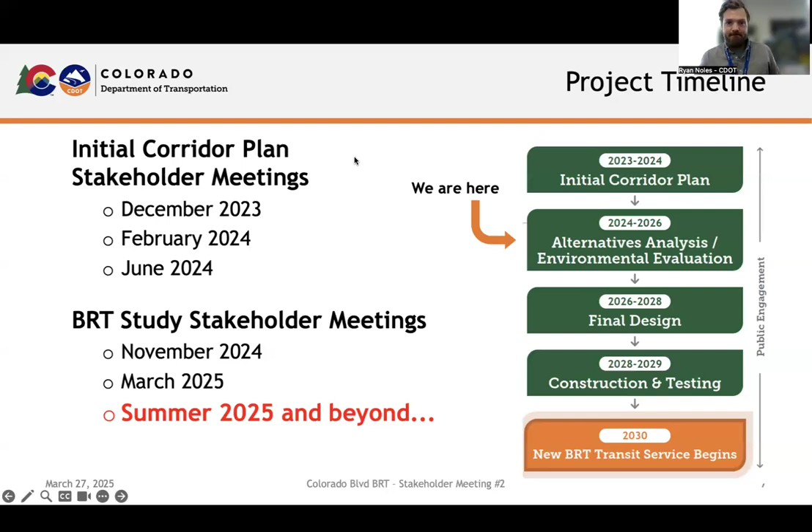So I think we talked a little bit about the project extents last time. Through our coordination with our local partners and our analysis of existing conditions, we have done some work around looking at what makes the most sense for the route for the BRT and for where stations could potentially be located. And so we looked at a lot of different pieces of data. We looked at employment density, propensity for transit, the existing Route 40 ridership, population density. We looked at some travel patterns using some openly available data, as well as land use and development trends.

And where we landed with the project scope from north to south is that the BRT should run between 40th and Colorado Station, which serves the A Line running between Union Station and the airport, and continue all the way to Southmoor Station, just south of Hampden near I-25. This is a little bit different than what we initially had discussed with the BRT ending at the Colorado Station, which is near Evans and Colorado, just south of that part of I-25. One of the reasons that we felt this was an important change to make is, one, it is the current route for the number 40 bus. So that is the route that would be replaced by the BRT.

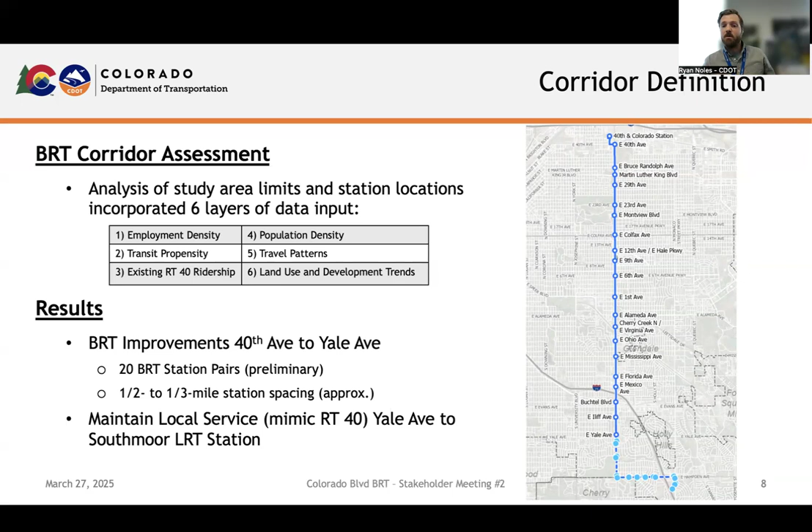We felt that given constrained budgets and ensuring that we're using the money that we're able to secure for this project most effectively, it was important to limit the capital improvements north of Yale Avenue, and then at some point south of Yale, and then over east on Hampden down to the Southmoor station could potentially be a phase two at a future date. Next slide.

Okay, so the timeline for the alternatives analysis in particular. So the last time we met, we were talking about concepts and the screening criteria for our tier one feasibility screening. This is sometimes called a fatal flaw analysis, and we'll talk a little bit more about that. So we've done that analysis, and I'll go over the results of it here shortly. Right now, we are just starting our tier two screening. This is where you start to get into specifics about each of the different alternatives, thinking about things like travel times, safety, connectivity, et cetera. So we'll talk more about that at the end of the presentation.

And then you can see once we start to wrap up this phase of the alternatives analysis, we will hold public meetings. So we are anticipating those for late June, early July, around there. And then starting in July, we will begin narrowing down the design of the project to what we call the preferred alternative. So with that, let's discuss the tier one feasibility screening.

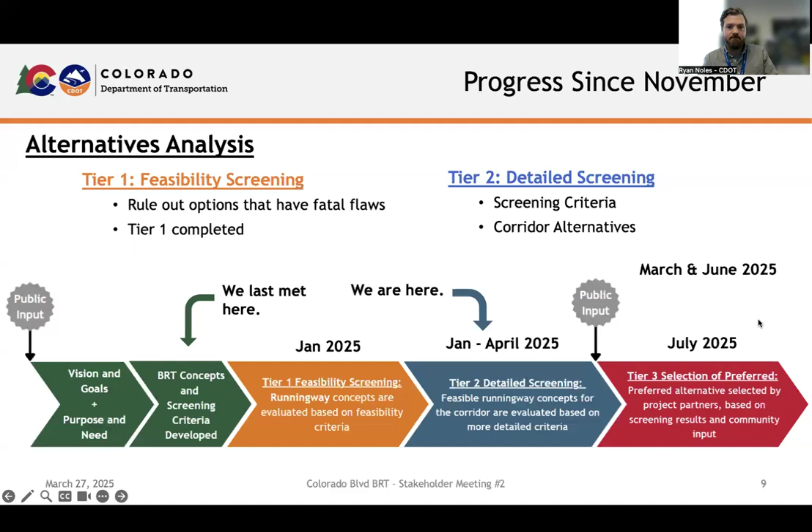But before I do that, one thing I did want to loop back on, and this was discussed at our first stakeholder meeting, was including a side transitway in that feasibility screening, so including it as one of the alternatives to be evaluated through this process. So we did go into what the side transitway could potentially look like for Colorado Boulevard, given that tier one analysis. So going forward, and next slide,

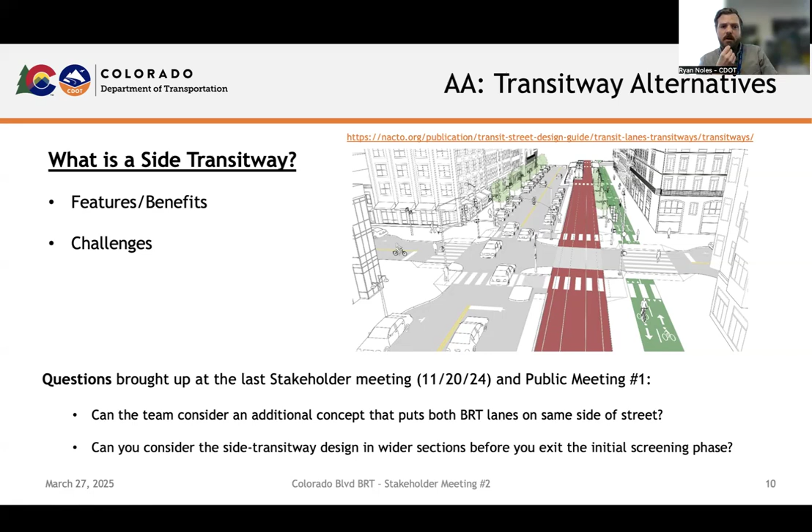we did include that. So some of the features of the side transitway that are a little bit different, which you can see in these graphics here, is that both of the transit lanes are all on one side of the street, as opposed to a center running BRT, which has the two lanes in the middle of the street and is typically separated by a median. Although I will say that the transitway alternative is very similar to a center running BRT where the lanes are not separated by a median. So that's maybe a distinction without a difference.

But then there's also the side running BRT, which has the bus lanes curbside running with the direction of traffic, so the two lanes on either side of the street. Mixed flow is very similar to side running BRT, except that it doesn't have the bus lanes. It has mixed flow traffic operations, meaning that the lane is shared with every other vehicle on the roadway. And then, as I mentioned, the side transitway is all on one side of the street or the other, so it could be on the east or the west side. We evaluated both in our fatal flaw analysis, and so we'll go through that. Next slide.

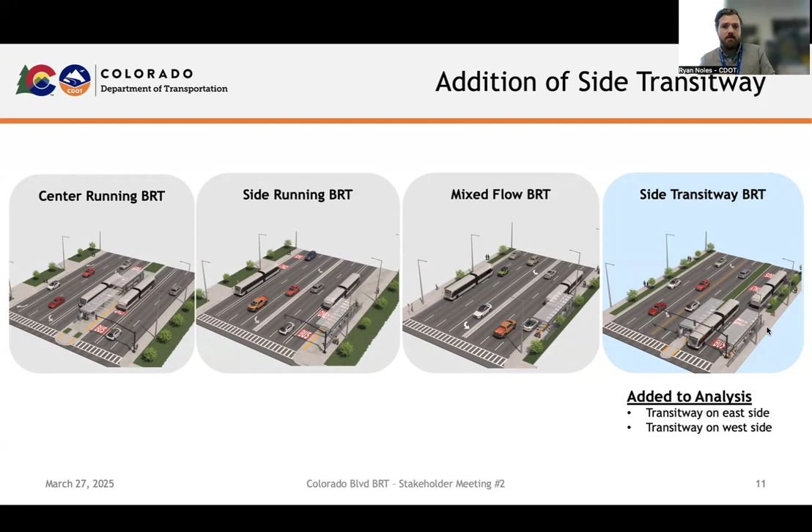So we did some research into where the side transitway works, and I'll talk a little bit about some examples that we looked at. And what we found in this research is that typically this is an alignment that's used with light rail versus bus rapid transit. And I suspect that has a lot to do with utility costs. So extending utility and catenary, which is the electric lines over the street, over the entire street is probably a lot more expensive than just having it on one side or the other.

It also works really well on one-way streets where you don't have a lot of bi-directional turning movements. Lower speed streets, it typically tends to work well on lower speed streets. That's certainly where we saw a lot of the examples. And then finally, really urban places that don't have a lot of curb cuts or driveways. So you don't have a lot of those bi-directional turning movements across the transitway. It's really kind of a guideway that is distinct within the curb to curb area, but also not really sharing much room with other transportation modes, I should say.

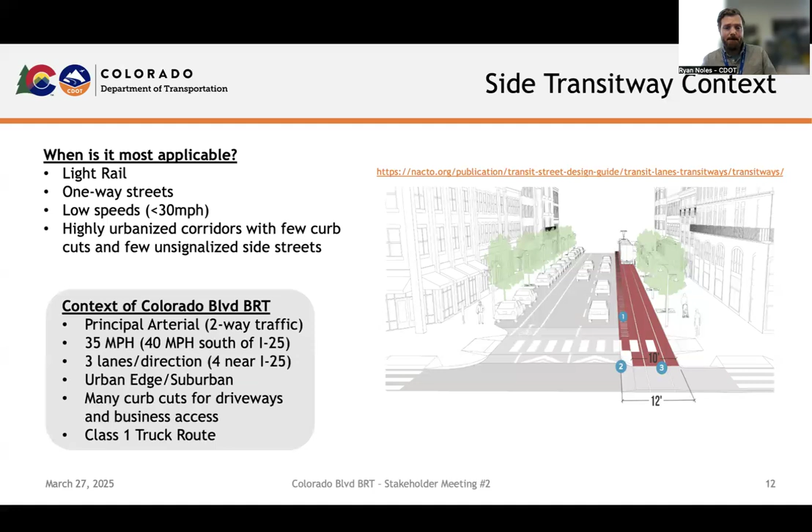So, I saw Jill, you wanted to ask that. Are our land use designations current or planned in Blueprint Denver? Yeah, when you say it's suburban or urban edge, is that the current land use or is that the future desired land use under Blueprint Denver? I believe it's the Blueprint Denver future land use. Is that right, Anthony? Yeah, it's both. That's the current land use, and it's kind of bleeding in towards more urban, but it's kind of in the middle there. But yeah, we looked at Blueprint Denver as well when we were categorizing it. Thanks.

So as I mentioned, sorry, hold on. I'm just going to jump in. Also from Colorado and I-25, from the Colorado station down to Colorado and Yale, we just completed and have the Near Southeast Denver neighborhood plan. That's in District 4, but I believe it continues. I don't actually know what the northern street would be for Colorado Boulevard. But the Near Southeast Denver neighborhood plan also went through an extensive process for that zoning. Thank you, Councilwoman.

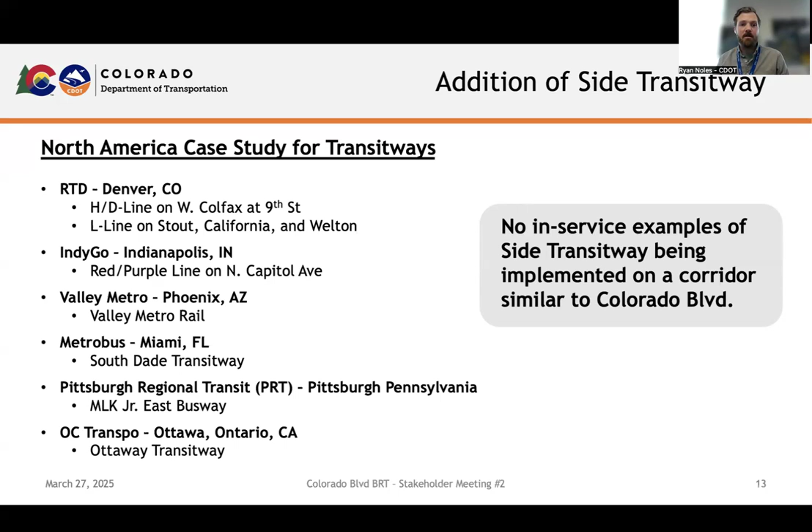Next slide. Any questions? I know we had Jill's. Does anyone else have any questions about the transitway or any of the contexts that we've set up, because we're going to dive into some of our initial tiering criteria next. What other questions do we have? Are there more in the chat, Julie? No. Okay. I saw Jill's, so definitely feel free to put your comments in the chat and questions, or raise your hand, or just unmute. We want to make sure that we're hearing from you, but I don't see anything right now. Let's move forward. And if anyone thinks of anything, please pop it in the chat or raise your hand. I'm happy to take questions on the fly.

So, okay, want to jump into the tier one feasibility screening. So as I mentioned, this was really more of a fatal flaw analysis. So what we were really considering was two major things here: full property acquisition and major infrastructure impacts. So on the full property acquisition, really looking at this from impacts that would result in needing to acquire the full property for commercial and residential, which are a little bit different. So we considered a full property acquisition for commercial properties to be impacts that would require the project to take a physical building, or it would result in impacts to the operations that could potentially close the business. So that was what we considered a full property acquisition on the commercial side.

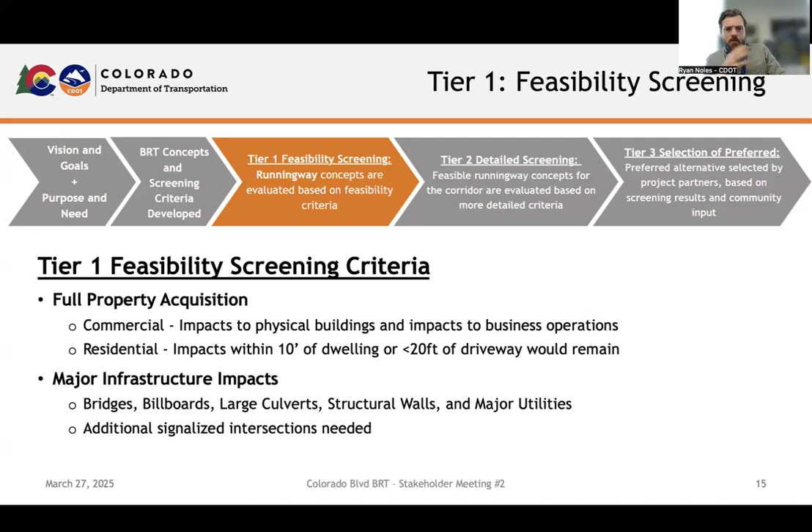Okay, so next slide. So discussing those major areas for the fatal flaw analysis, the things that we ruled out are adding new lanes to Colorado Boulevard. As I mentioned, there are in most cases 3 lanes in each direction and a turn lane at intersections. This would be adding additional lanes either in the middle or on the sides of the street to accommodate BRT. So no new lanes.

We also ruled out the side transitway, and the reason was the property acquisition piece of those 2 criteria that I just discussed. The side transitway would require that we close a significant amount of driveways because of the bidirectional impacts from the movements of vehicles across the transitway. So we felt that would require a pretty significant amount of construction, either for accesses off Colorado Boulevard that don't exist today, or in some cases, intersections that aren't signalized today would need to be signalized.

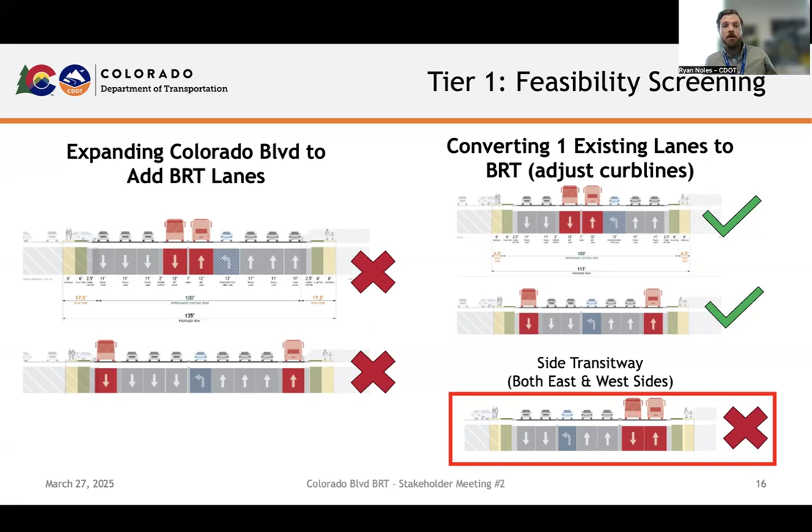So what does move forward is converting existing lanes in the corridor to bus lanes, either in the middle of the street like Colfax or on the side of the street like Federal Boulevard. So that will move forward into tier 2. Next slide.

And so the picture on the right is the same. The difference between the two versions of converting lanes is doing curb work versus not doing curb work, and there's drainage impacts with that. That'll get addressed further in the analysis, but suffice it to say the center running BRT as well as side running BRT and bus lanes moves forward. And then mixed flow also moves forward, where the bus will share lanes with vehicles. Next slide.

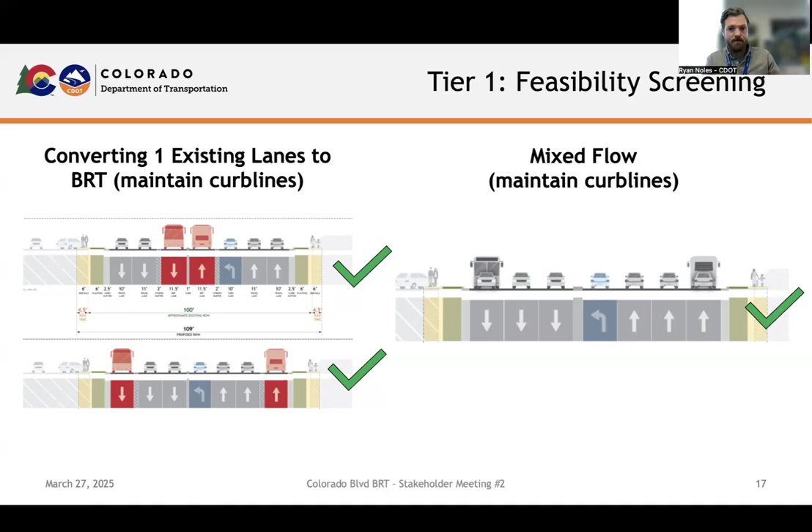So this slide basically summarizes what I just said. Expanding Colorado Boulevard to add bus lanes would require property acquisitions that are unacceptable to the community and unacceptable to CDOT. The impacts to the major infrastructure would be significant if we were to add lanes, because we'd have to build new bridges and new retaining walls and move billboards with the big poles that they're on. So those will not move forward.

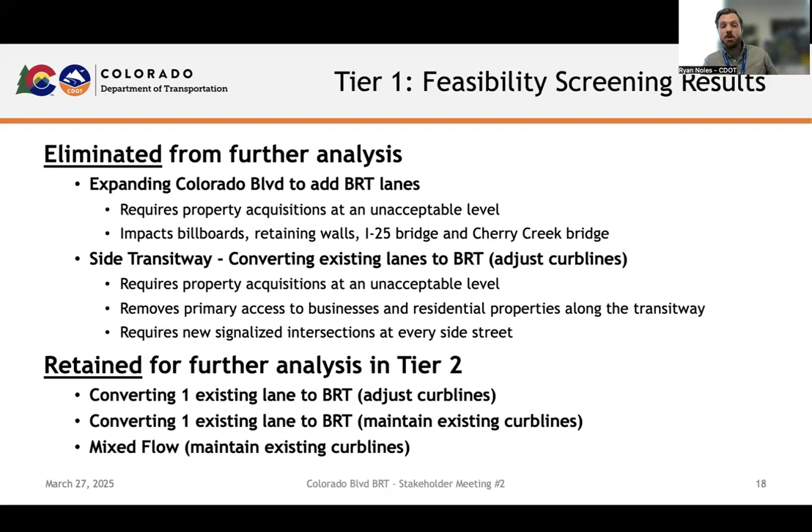The side transitway, as I mentioned, requires property acquisitions because of the closure of driveways. It also requires new signalized intersections at every side street that doesn't have a signal today, so that is a significant issue as well. But converting one existing lane in each direction, either on the side or in the middle, will move forward. The adjustment of curb lines versus keeping the existing ones is a little more down the line, but the center and side running alignments move forward, as well as the mixed flow operations. Next slide.

So for tier 2, as I mentioned, we are just starting this process, and there are several criteria we'll be evaluating for the ones that move forward: center, side, and mixed flow. The travel time of the corridor, both for the bus and for general travel. Traffic operations, so looking at intersection delays, things like that.

Right-of-way impacts, at a very high level. Obviously, we're not doing survey at this point, because you don't really want to do that until you have an alternative selected, but we are looking at a very high level at what we think right-of-way impacts would be and their scale. And so we'll have some projections of what that could potentially cost as well. Corridor safety is something we'll be looking at for all users: transit users, bikes, peds, as well as drivers.

Environmental considerations. So this will include both benefits and impacts. So again, very high level because we're not quite going in as far as NEPA yet. Potential ridership. So we'll look at the no build, so existing ridership, and then what each of the alternatives does to improve ridership, and cost, and finally multimodal connectivity. So making sure that we're considering how to connect best to each of the alternatives and what do we think that will do for the overall network.

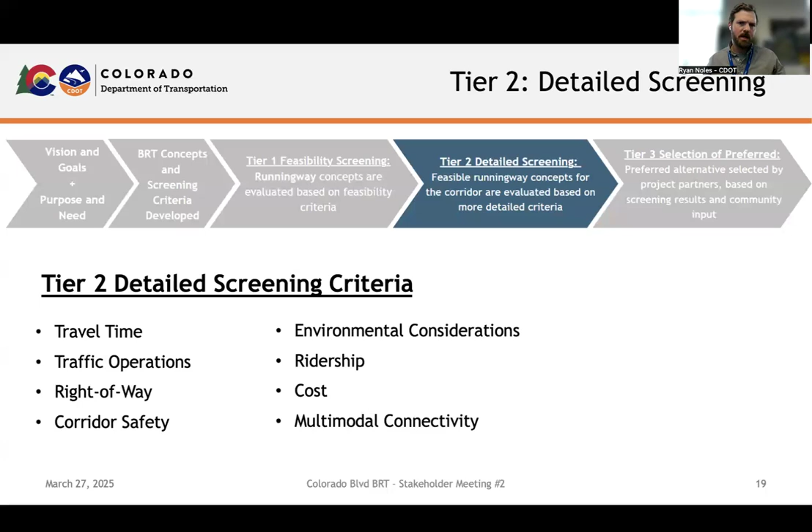Yeah, and I think on the next one or two slides, we have some information that coincides with that pretty well. At the last meeting, we talked about bikeways, both connecting to and on Colorado Boulevard. Certainly with considering bike facilities, we are also considering better pedestrian facilities. It could be that the project lands on multi-use paths, which do exist in some parts of the corridor. Maybe in other parts of the corridor it makes sense to have bike lanes that are separate from the sidewalks, most likely behind the curb, if I'm going to be honest, on Colorado Boulevard.

So what we're doing really is taking a look at where we anticipate stations could go, looking at the existing conditions, and really trying to identify where the gaps and the areas for improvement exist. And I think the next slide shows that for bikes. If you can go to the next slide.

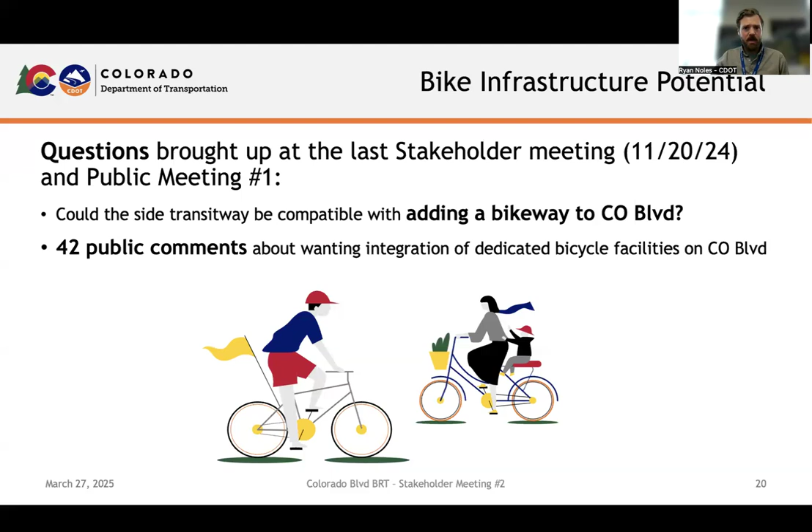Yes. So you can see in the green, we've done some work using existing data sources to really identify where bike infrastructure has already been identified as a high priority, but then where we think there's a lot of potential for additional bike infrastructure. And not to say that the areas that aren't highlighted on this map don't matter. I think they certainly do matter, and we'll be looking at those as well. But these are some focal areas that I think we're going to be considering.

And I would say that we'll be doing the same thing for pedestrian improvements as well. Looking at intersections in particular, we're going to want to make sure that, particularly where stations are located, the crossings are improved and optimized for folks who are accessing the BRT either in the middle of the street or at the sides of the street.

And so we'll think more about what that looks like on an intersection by intersection basis once we have the alternative selected. But certainly things like crossing improvements, signal timing, other things like curb extensions where they make sense. Those are things that we'll be considering.

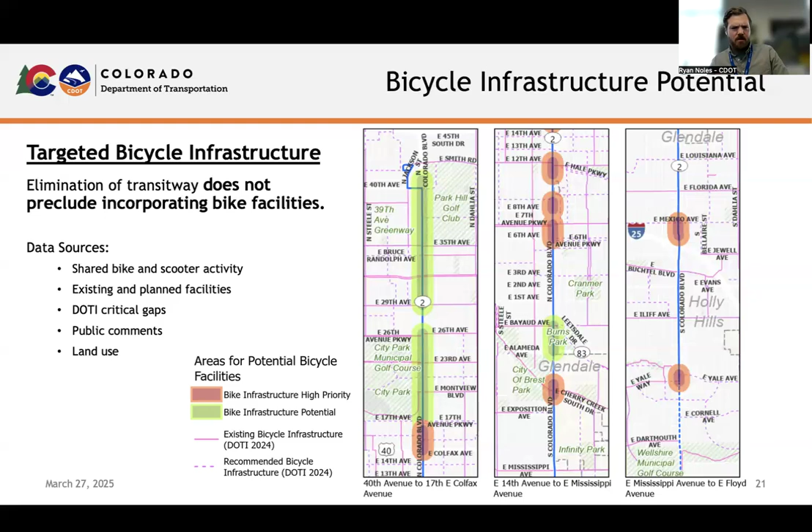All right. I think I kind of covered the bike piece a little quickly, just within the context of that question. Did anyone have any follow-up questions about the bike piece specifically? I don't want to shortchange it. We got a yay bikes. Yes. I have a comment. I was just typing it in.

I would certainly welcome bike facilities on Colorado, but our issue is more about the east-west connections from activity centers that are going to be just off of Colorado. One great example is, we've talked about the multimodal center at Burns Park, but if we have micromobility options to get people all the way over to the shopping mall or to other places, it really isn't a safe way to do it currently. And there's lots of places along there. Even the new development in Glendale, the 4 Mile District, is going to be a big activity center, but it's just pushed back off of Colorado.

Yeah, thanks, Stuart. We will be looking at, as I mentioned, connections to the line from the side streets. We're working really closely with DOTI on that. So certainly, we agree that the connections are really important.

We have a question from Councilman Kashmann. As currently scheduled, will we have time to learn from the successes or failures on the Colfax BRT project before we start building the final recommendations for this project? Yes, we will. Feel free to correct me. I believe that the Colfax BRT is scheduled to be complete by early 2027. Is that right, Mai? Is the timeline still on schedule? Yeah, it's still on schedule. Okay, great. So we don't anticipate being in construction on Colorado Boulevard until 2028 at the earliest.

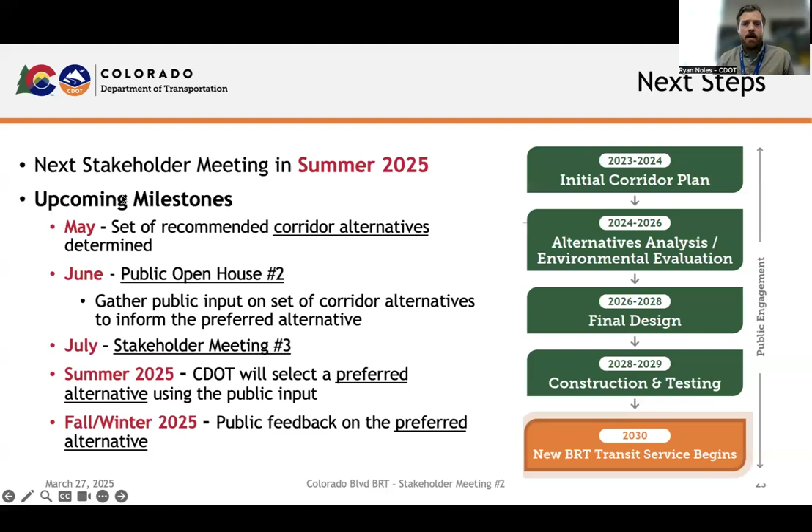Okay, so that's our last slide. Any last questions? I know we're a little bit over time, but happy to stay on and answer any more questions if you have them. Do you have a date for the next open house? We're still working on scheduling it, but we should have it here shortly. Okay, great. Thank you.